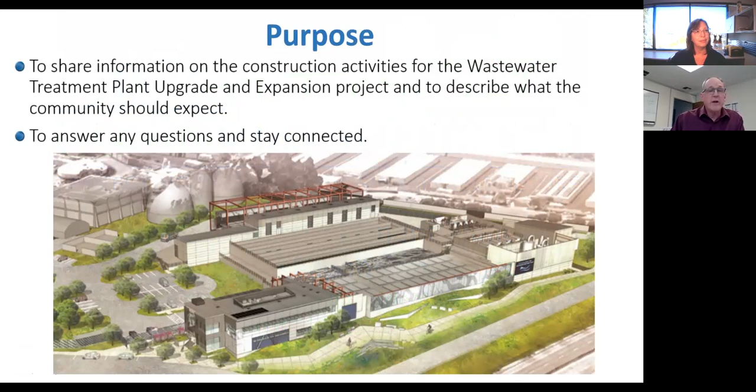For the update of the wastewater treatment plant upgrade and expansion project, the purpose of our meeting tonight is to share information on the construction activities on this project and to describe what the community should be expecting in the upcoming year. We're here to answer any questions you may have. We want to stay connected with the community.

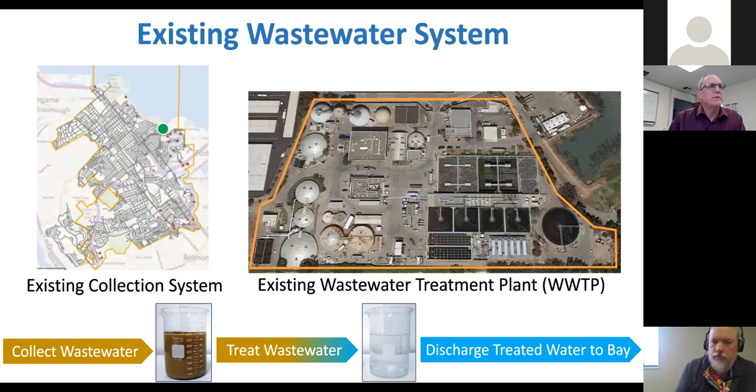So let's get started. The existing wastewater treatment system consists of two components. The existing collection system, which is a series of pipes, manholes, and lift stations, which convey the wastewater from your homes and businesses to the wastewater treatment plant. The second major component is the existing wastewater treatment plant itself, which removes solids and treats the solids from the wastewater, and then treats the wastewater. It disinfects it so that it meets the regulations of the regulatory agencies for disposal into the bay.

The program goals consist of replacing aging infrastructure and facilities, building wet weather capacity to prevent overflows, meeting the current and future regulatory requirements, which all align with the City of San Mateo and Foster City's long-term sustainability goals, for basically protecting the bay and the community for the future.

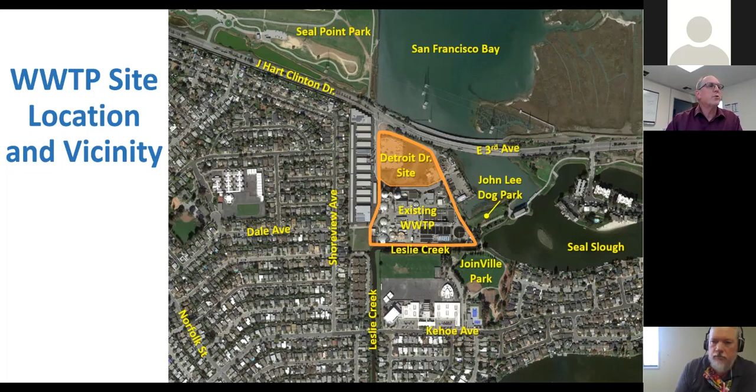Let's talk about the project specifics. The wastewater treatment site is located at the intersection of J. Hart Clinton Drive, also known as East 3rd Avenue, and Detroit Drive. The site is located just north of the existing wastewater treatment plant. To the north is 3rd Avenue and San Francisco Bay. To the east is John Lee Dog Park and Seal Slough. To the south, Leslie Creek and Joinville Park. And to the west is All American Self-Storage and the Shoreview Avenue area.

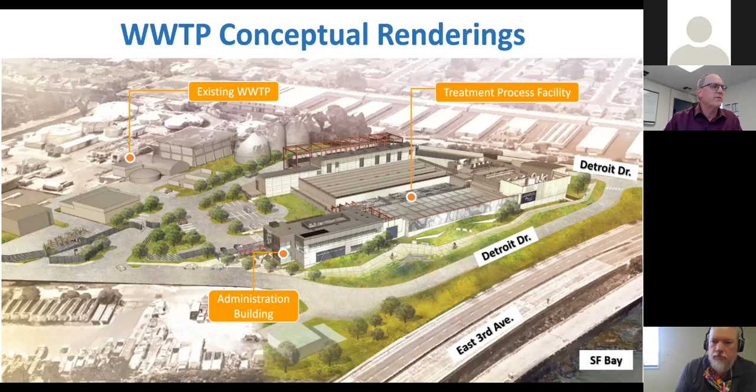When the wastewater treatment plant expansion project is completed, we'll have a brand new treatment process facility to treat the liquid portion of the wastewater. The existing wastewater treatment plant, portions of that will still remain, which will be handling the solids portions of the wastewater, and we'll have a brand new administration building. Part of the administration building will have an interface with the public. We'll have indoor education and exhibit space, and we'll also have outdoor signage and outdoor education area as well. And the existing bike pathway from Dale Avenue will continue across the front of the new admin building.

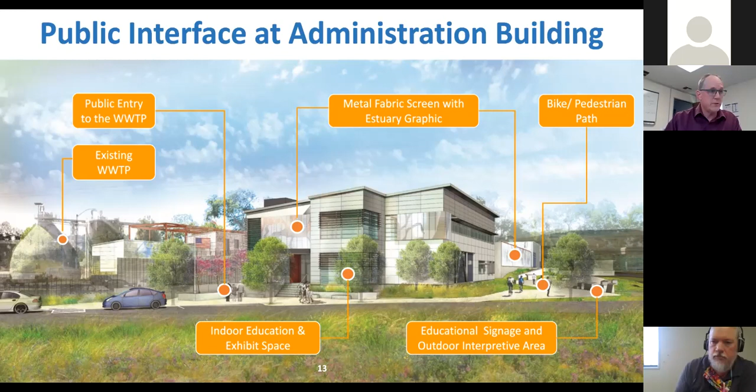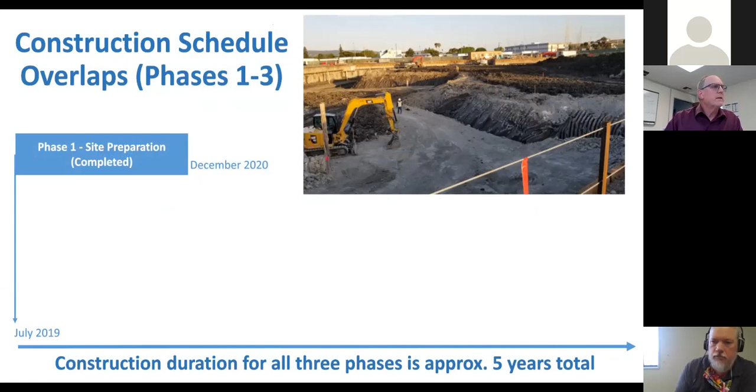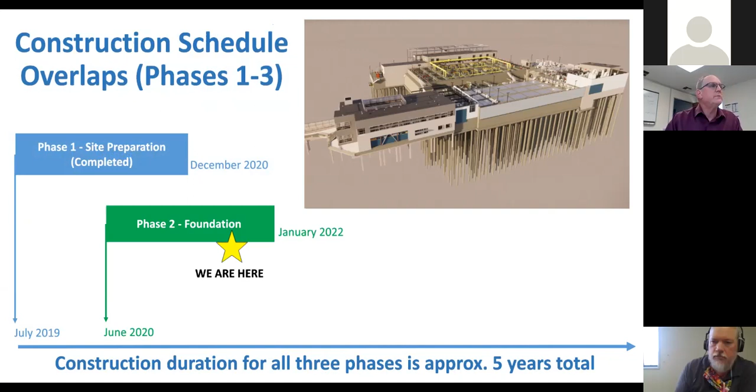Our construction is scheduled to last approximately 5 years, and it occurs in 3 phases, which overlap. The first phase, the site preparation phase, began in July 2019 and was completed last year in December. The second phase, the foundation, began in June 2020 with pile driving and is expected to be completed in January 2022. Our third phase, the new facility construction, began in September 2020 and is scheduled to be completed in August of 2024. What have we completed to date?

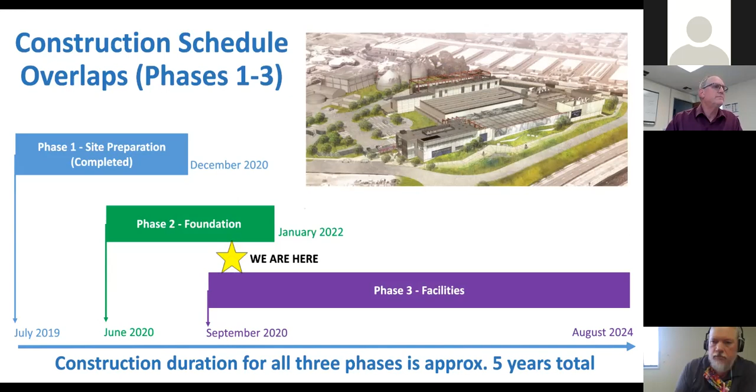Phase 1 site preparation is completed, and phase 2, a portion of it, the stage 1 pile driving, has been completed.

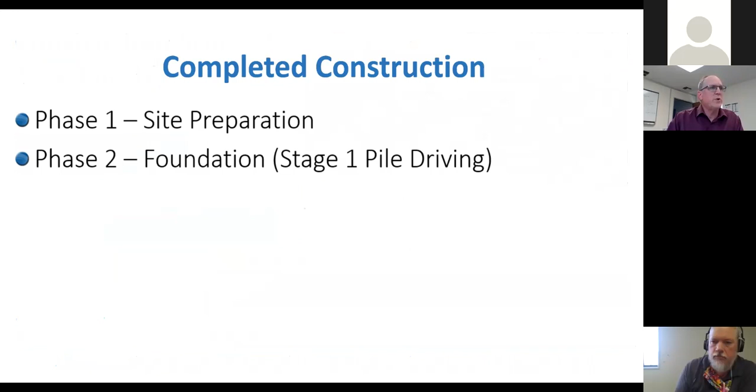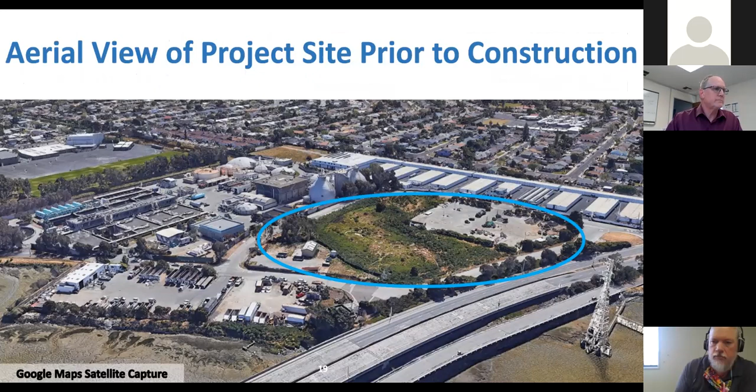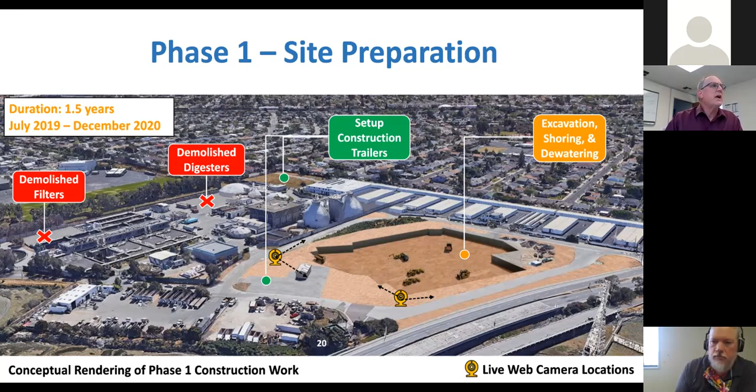Prior to construction, the new site of the treatment plant for the new facilities consisted of a parking lot, some open space, and a few small buildings. During phase 1 site preparation, which lasted from July 2019 to December 2020, the contractor cleared the site, did excavation and shoring and dewatering for the new facility, set up his construction trailers, and demolished a few facilities at the old treatment plant.

During phase 2, which began in July 2020 and lasted 6 months to December of last year, the contractor installed nearly 1,600 piles in the excavated area and a few at the ground level. In order to mitigate the noise coming from the pile driving, we installed a temporary 16-foot high sound wall.

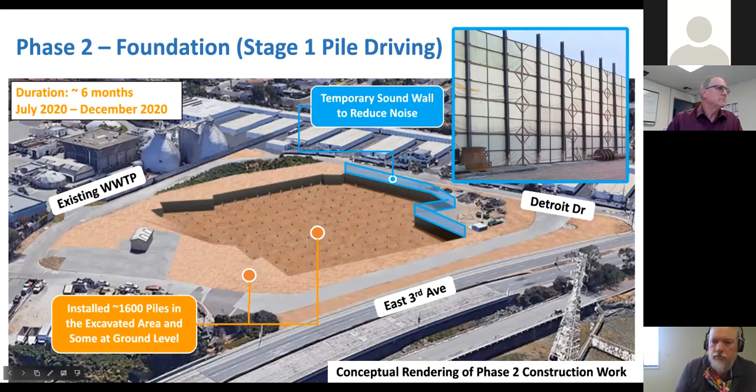The piles are needed to support the structure, and they range in depth from 80 to 105 feet long. There will be approximately 2,000 piles when all is said and done, and the new facility will rest upon that.

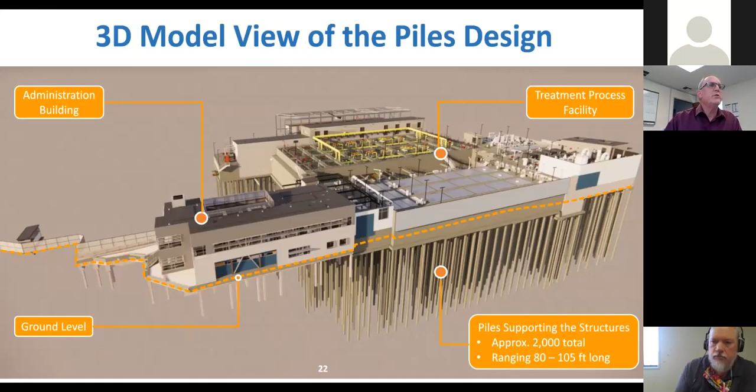Why are foundation piles needed? The piles are driven past the young bay mud soil above it, down to the old bay mud, which is stiff and strong soil, providing a stable foundation. Pile caps are then placed on top of the piles, and the new structure is built on top of that. The piles prevent the structure from uplift due to high groundwater, prevent settlement due to shrinkage, and keep the structure in place during seismic events.

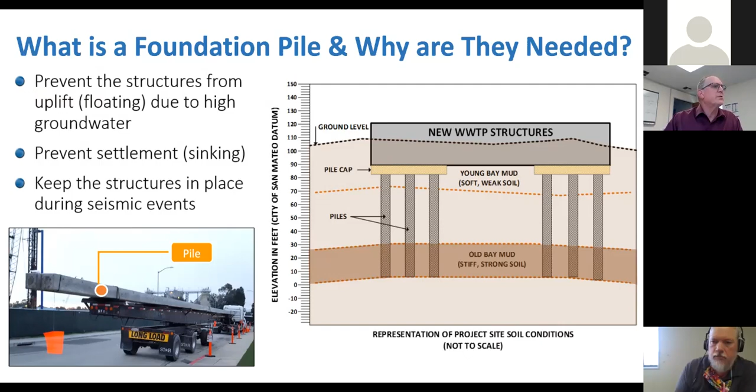I would like to call your attention to our website, www.cleanwaterprogramsanmateo.org/WWTP/. If you go to this site, you can see we have 2 cameras showing the construction. These cameras are on 24 hours a day, 7 days a week, and show the progress of the construction live, so you can see what's going on at the site.

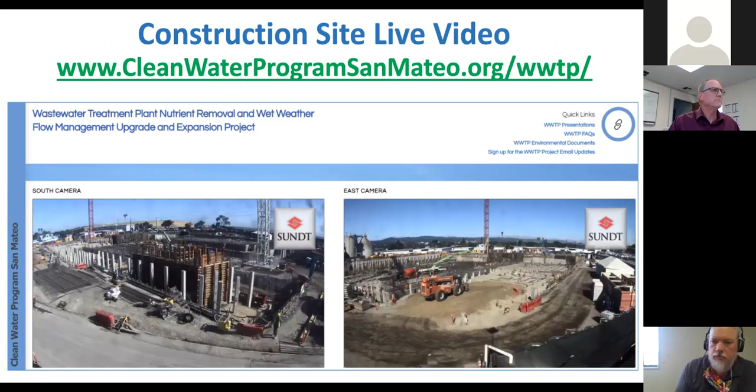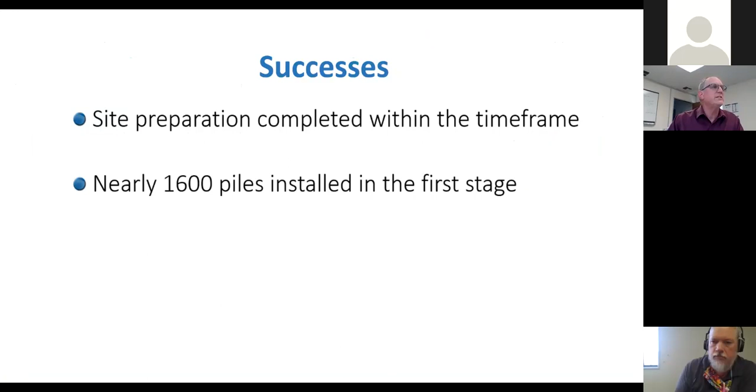We have been very successful in our first phases of the job. Site preparation was completed on time, and we have nearly 1,600 piles installed in the first stage. I want to thank you all, because this project could not have been successful without the great support and patience we have received from this community, and we ask for your continued support and patience in the upcoming years.

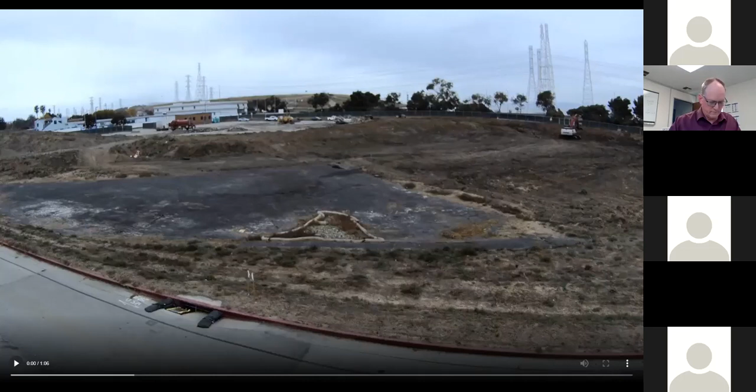I'd like to start off before we get going on this video. What you're going to see is about 18 months worth of construction activity. What you see on the site today is a picture of the site around mid-November 2019, when most of the project got moving after all the funding was worked out. So we'll take it from this still shot and move forward 18 months. We'll pause periodically at certain points just so I can narrate what you just saw or give you a preview of what you're about to see, about 5 or 6 different pauses through this video.

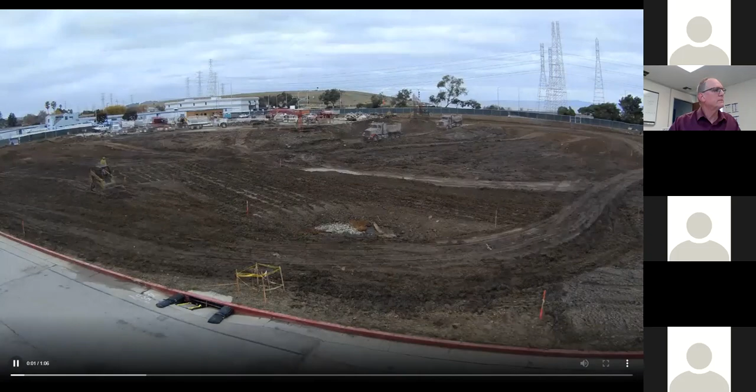What you're seeing in front of you is some big major equipment we brought in, large drilling rigs to mix native soil along with slurry to form a 60-foot deep, 3-foot thick impervious wall. This wall was a combination earth retaining and groundwater cutoff wall. Inside that interior loop of wall, a dewatering system is being incorporated to drain the water and moisture from the interior of the site. As Tom alluded to, we're dealing with bay mud and groundwater levels that are 6 feet below the previous surface level before we started.

So we hit water pretty quick, and we're dealing with some pretty sloppy mud, so we had to dewater it. What you'll see next is us finishing up the dewatering wells and treatment system, as well as finishing up this wall. The upper layer of excavation is pretty much all fill material that's been brought in over the years, so everything but bay mud was excavated out.

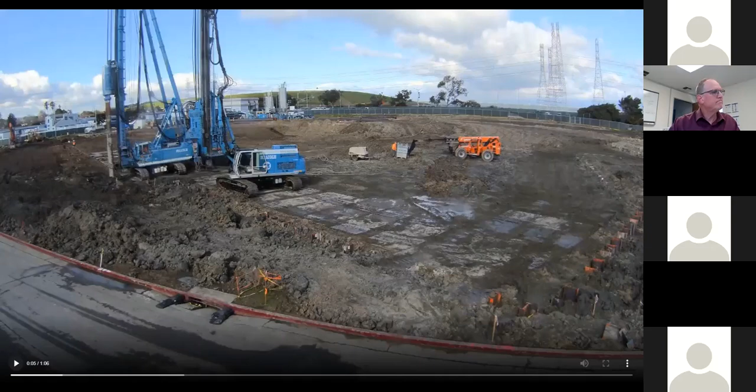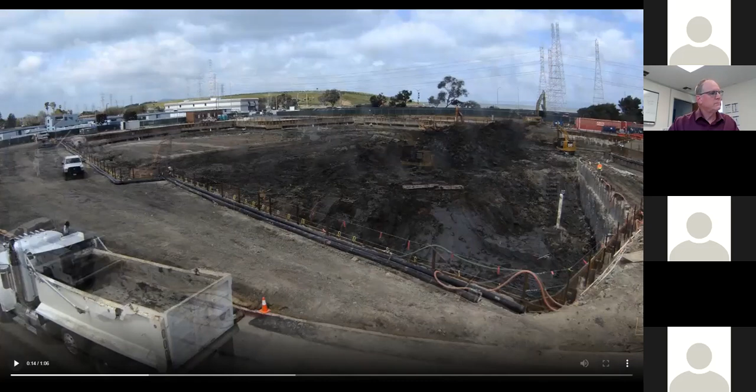What you're seeing is, just before this image, down in the corner where the dark stuff is, we're starting to get into the deeper elevations. You can see the difference between the bay mud, which is black, thick and heavy, versus the upper elevation we've now finished with. We went down 22 feet from the existing grade. In the upcoming segment you'll see a white substance start appearing on top of the surface — that's where we excavated down and started mixing lime with native soil to form a 6-foot thick sub-base, to solidify it for the equipment as well as for the structural capacity of the facility.

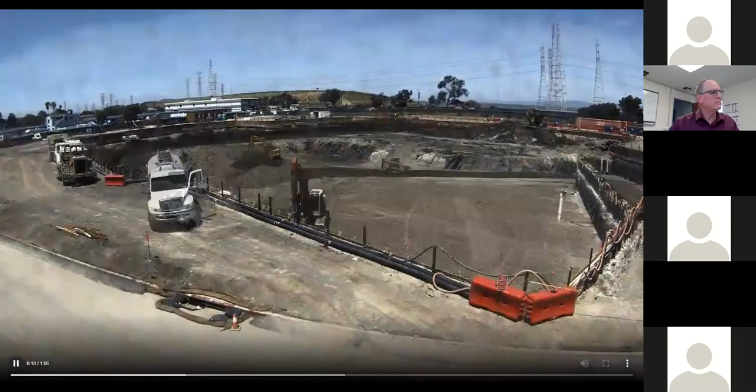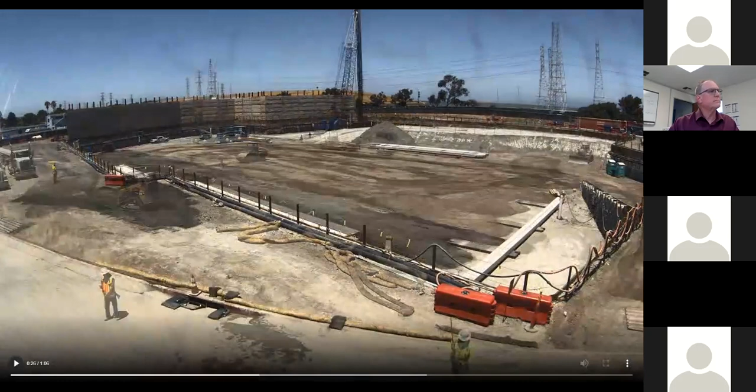So here we're at with the pile driving rig in the back. We mobilized the pile driving rig, and what you see is some of these longer piles sitting laying horizontal on the surface. We're just prepping the area to get ready to start driving the first piles of stage 1. Stage 1 consisted of 1,600 piles, and this is us initiating that phase. This timeframe is July of 2020.

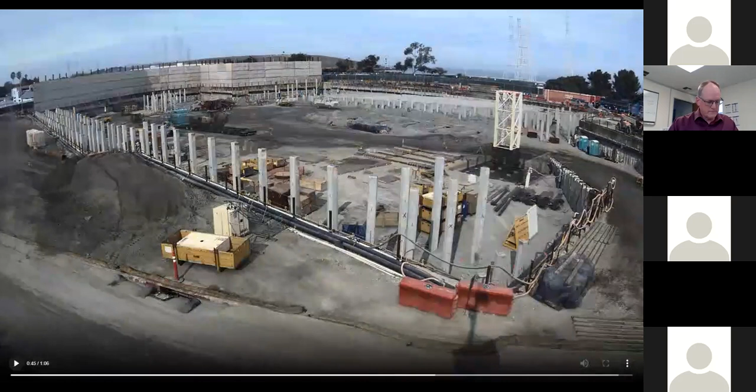What you just saw was basically 6 months worth of pile driving work from July to late December, mid-December of 2020. That occurred with installation of about 1,600 concrete piles ranging from 80 to 105 feet deep. You're also starting to see the pile driving phase out of stage 1, and we're seeing our phase 3 scope begin. You start seeing trucks and equipment arriving to build the foundation on top of the piles we just drove down at the lower elevation, basement level area.

So here's where we're at as of last week. GMP3, what we call phase 3, was released, and this is continuing to attach into the piles we've driven and start building the foundation for the wastewater treatment plant structure. What you see down there is a lot of rebar, a lot of concrete, and a lot of walls starting to come up out of the basement level. We have about 4,000 cubic yards of concrete poured, with a lot of rebar and steel going on.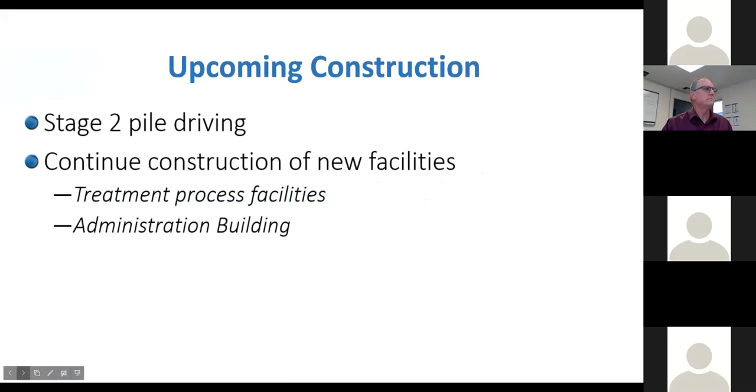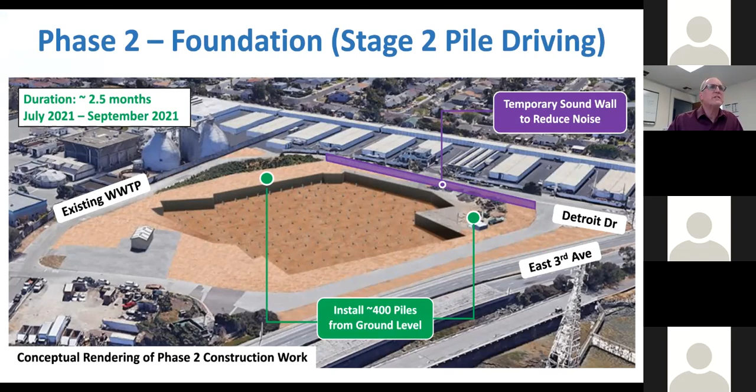So what can we expect in the upcoming year? We'll begin our stage 2 pile driving in July, and it should last about 2.5 months. We'll be continuing construction of our new facilities, consisting of the new treatment process facilities, as well as the administration building beginning. Phase 2, the foundation stage 2 pile driving, will consist of approximately 400 piles at ground level, as opposed to the excavation area as in the past under phase 1. We will be installing a temporary sound wall to help reduce the noise level.

The pile driving method was selected specifically for the site because it's optimum for the soil and site conditions we have. The precast piles are manufactured off-site and brought in, and we're also using a hydraulic hammer because this is one of the methods with lower noise levels and it produces no smoke emission. We're also shrouding the top of the hammer for noise as well.

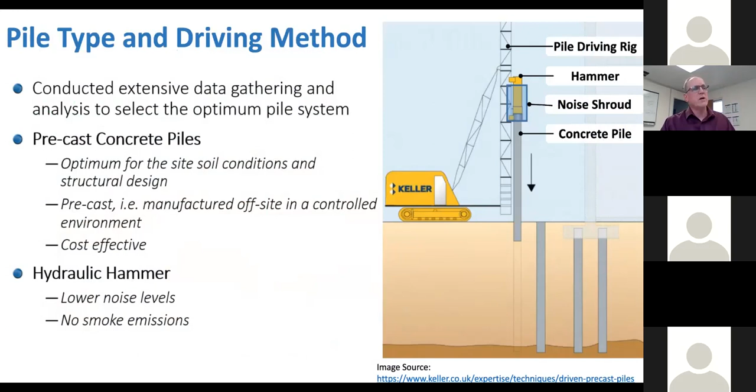However, noise can be expected during pile driving. Under stage 1 activities, our noise levels were between 90 and 100 decibels. Under stage 2, starting in July 2021 and lasting approximately 2.5 months, noise levels are expected to be 90 to 110 decibels. The decibel level decreases the further you're away from the activity. For instance, 110 decibels is what you'd hear at a rock concert, 100 decibels is what you hear with a jackhammer, and 90 is what you hear when a heavy truck goes by.

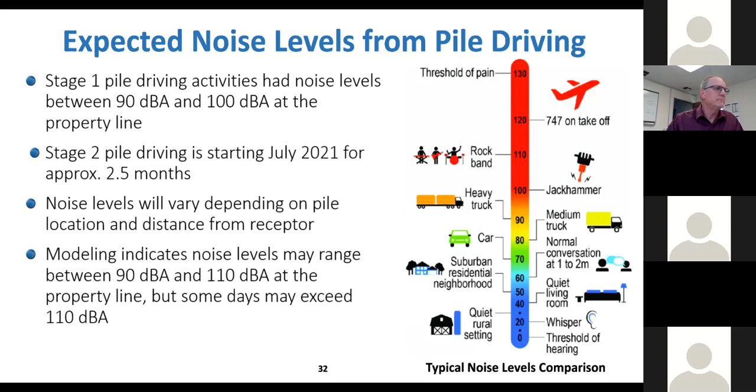As you can see in this exhibit, the piles shown in red, roughly 10% of the piles to be driven, are expected to occur at the 110 decibel level or so. The orange are between 85 to 100, the yellow 78 to 95, and the green less than 90. However, the distance you are away from the pile dramatically affects the sound you hear. For instance, the Shoreview area is 310 feet from the closest pile, and Mariner's Island is almost 1,500 feet from the nearest pile. Once you get about 200 feet from the piles, the noise level drops below 90 decibels.

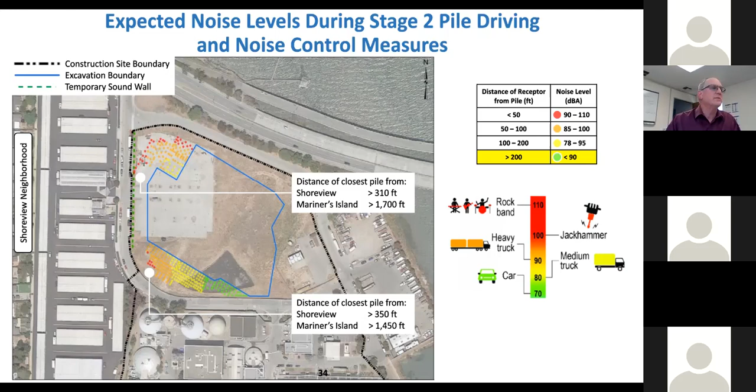In addition to the pile driving, we'll be constructing our new facility, and it will continue with the installation of formwork, rebar, concrete work, and installation of process piping.

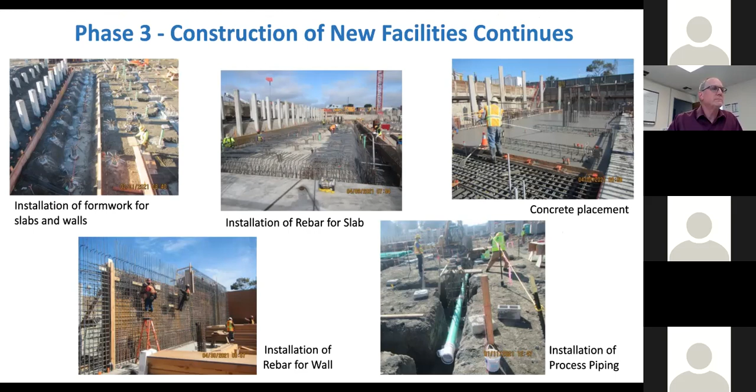But with the increase in construction activities, there comes more personnel to the construction site. There'll be an increase in traffic to and from the site, and we'll require additional parking for construction personnel. So we'll be using the Anchor Road temporary staging area, as well as a portion of the Anchor Road parking lot. There'll also be an increase in construction materials coming to the site, such as pipes, valves, mechanical and electrical equipment, concrete, and rebar.

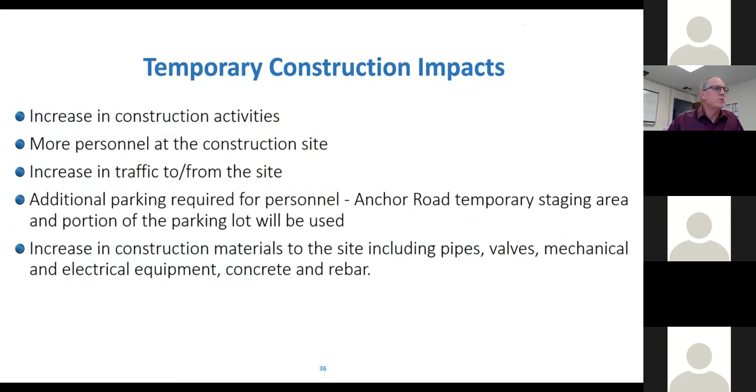However, our commitment to the community hasn't changed. Our construction site will still operate Monday through Friday from 7 a.m. to 7 p.m. The pile driving activities are restricted to weekdays only, from 8 a.m. to 5 p.m. The typical construction day is expected to be only 8 to 10 hours, and construction work is not planned for weekends. There may be exceptions, and if there are, they will require city approval, and public notification will be provided before construction on the weekend occurs.

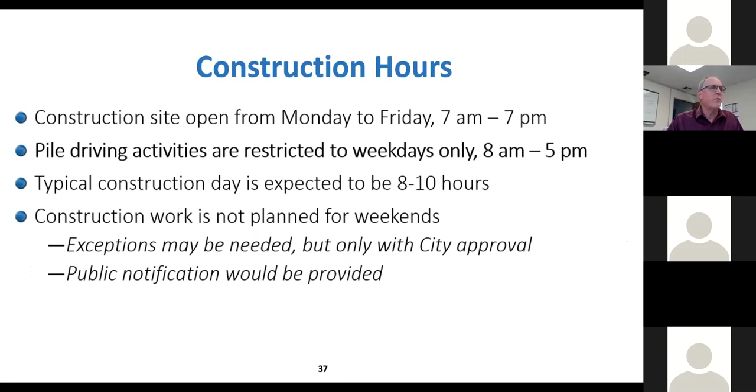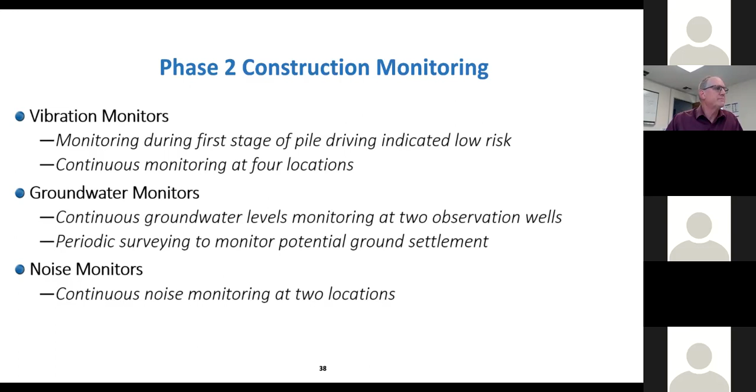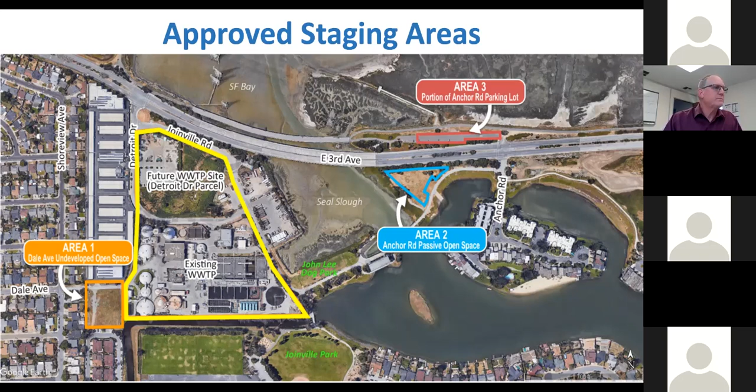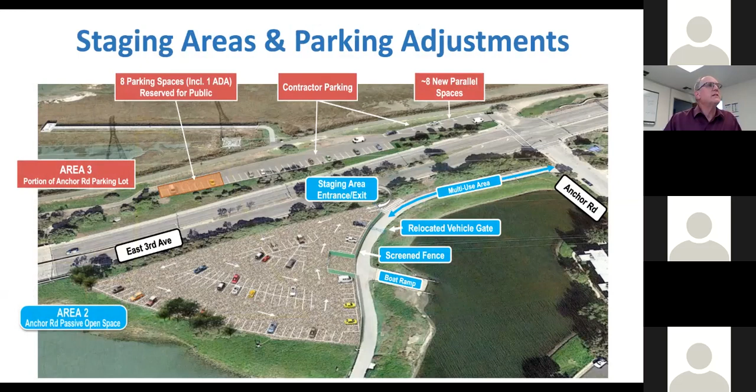As shown here, this is the Area 2 parking area that's been constructed for the personnel doing construction. And then we have the overflow spaces over here on the Anchor Road parking lot, but we will always maintain at least 8 spaces for the public, including 1 handicap space.

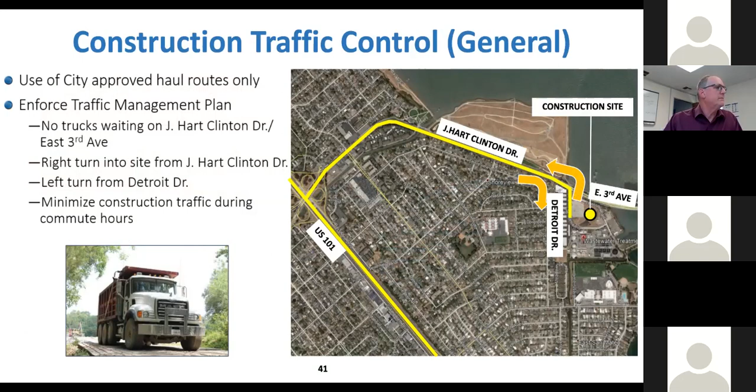During the pile driving exercise, we estimate between 10 to 12 truck deliveries of piles per day. There'll be no parking on 3rd Avenue, no trucks parking on 3rd Avenue. The delivery time for pile unloading will be between 7 a.m. and 7 p.m., but no deliveries will occur between 4 p.m. and 5:30 p.m., again to minimize impacts during peak commute hour.

Great, thank you all for that answer. I do want to remind everyone that if they haven't already found it, the website page cleanwaterprogramsanmateo.org/WWTP is a great place to go and watch the live construction happening. We've particularly set up those live cameras so you could keep an eye on construction as it was going.

I'm just curious, in a show of hands of those in the audience, how many have tapped into our live cameras and watched the live construction at any point during this construction? Just raise your hand if you have. I see one—great, there's one there that did. For anyone else who hasn't tapped into it yet, I really encourage you to go to that webpage. It's more interesting than watching paint dry, I guarantee it, and it's great to watch the live construction as it's happening right there in your city.

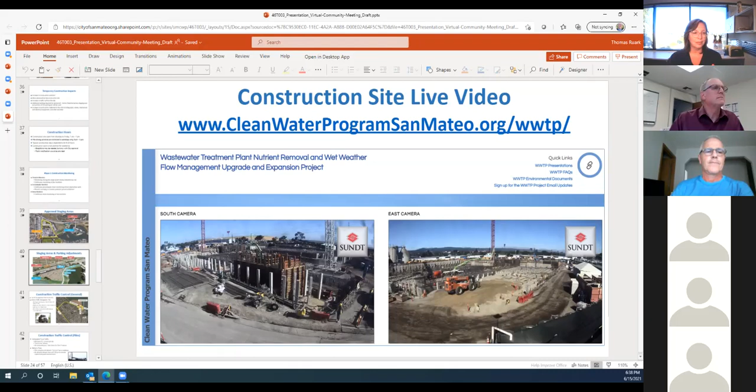And then, looking through last year's slides and this year's a little bit, in your presentation on the sound fencing that you built, I wondered why it didn't curve, I guess, to the south or more around the treatment plant. It kind of was right along Detroit, but didn't seem to curve around. I always wondered about that from a sound perspective—why it didn't partially curve around and maybe hook the site on the south or west side, depending on your orientation. So thanks, Drew. And then I have a question from Lewis after.

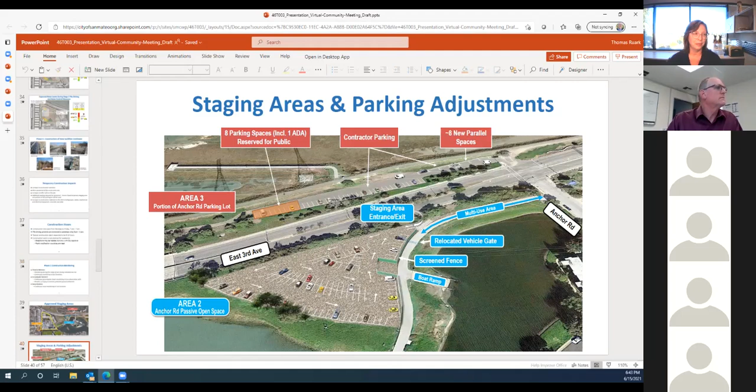Thank you, Mike. Drew, did that answer your question, or did you have another question beyond that? Just a clarification, I think. I think you still can hear me. Yes, we can. Yep. Because this is a good slide for that.

In addition to the reason why it stopped short in that area, there was a lot of construction activity planned in that area during that phase as well. So the longer we would have extended it, it would have limited the ability for the contractor to do as much work as he got done.

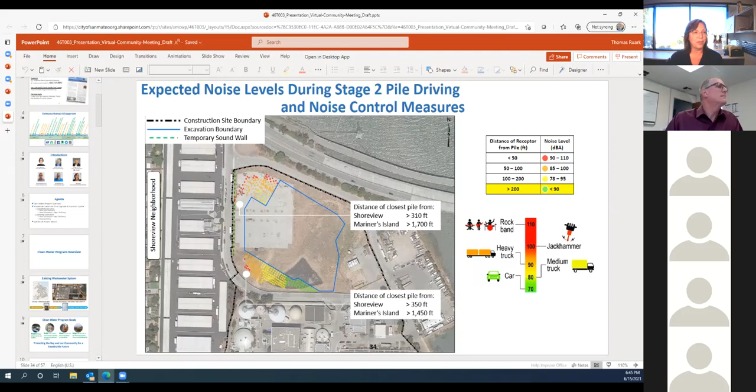Tom, do you mind going ahead to the slide where people can contact us? Anybody who needs to reach out to the project team can always reach out to us at any time. We're here for you to answer any questions. I do encourage you to visit the website to watch the live construction.

There you go. Don't forget there is a hotline where you can reach us at any time, and we'll take your emails at any time. If you live close to the project, you'll see a mailer and some social media in the next couple of days letting people know that our pile driving begins again in July, but this time with fewer piles than before.

And I see Drew with one more question. Go ahead, Drew. Oh, we have a question in the Q&A from Little Boy Milton again. He says, I might have missed it, but can anybody email me an answer? Yes, you did miss our answer to your question, Little Boy. Tom did explain why you don't have access to that path, and we will follow up with you by email.

Drew, would you like to ask your question? Yeah, this is probably more on behalf of my spouse, because she's asked about a spot near 42nd or 41st and El Camino. There's a city-owned lot that has a big pile of dirt, and she's wondering why it's there. I thought at some point it was related to the Clean Water program, and I was wondering if that's still the case. She's just wondering about the plan, not that it needs to be moved tomorrow or anything.